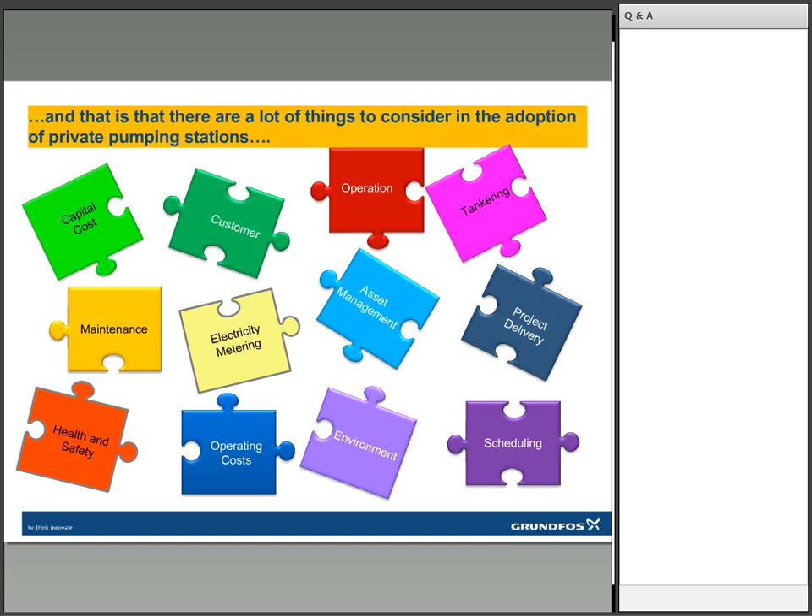Firstly, and I think the most important thing that we've got to consider is the customer. It's a key element to this, and we're going to be entering a relatively new environment here as stakeholders working in domestic environments, and I know that we have adopted the private assets years ago. However, a lot of that is not inside the building, and we can carry out a lot of the work outside of the building.

Here, from what we've seen, we've got lots of assets that are inside buildings, in garages, and we need to look at that, and we need to look at our different mindset working in that environment. Grundfos has got quite a lot of experience of that with our heritage in building services.

We need to look at how we work with the customers in terms of call center services. We're going to see an increase in calls. We're going to have a lot of new data that we've got to deal with. How should we address that? We've got to look at the scheduling of work to these domestic properties, access to the domestic properties and to the facilities where some of these assets sit, and what that might mean in scheduling and abortive calls.

We need to look at how these stations will be metered and how customers might be billed for electricity that they are using, and if that's off the customer's current electricity supply. Overall, we've got to look at the disruption that this is going to cause and what that might mean also to some of the regulatory measurements that Ofwat might put in around this.

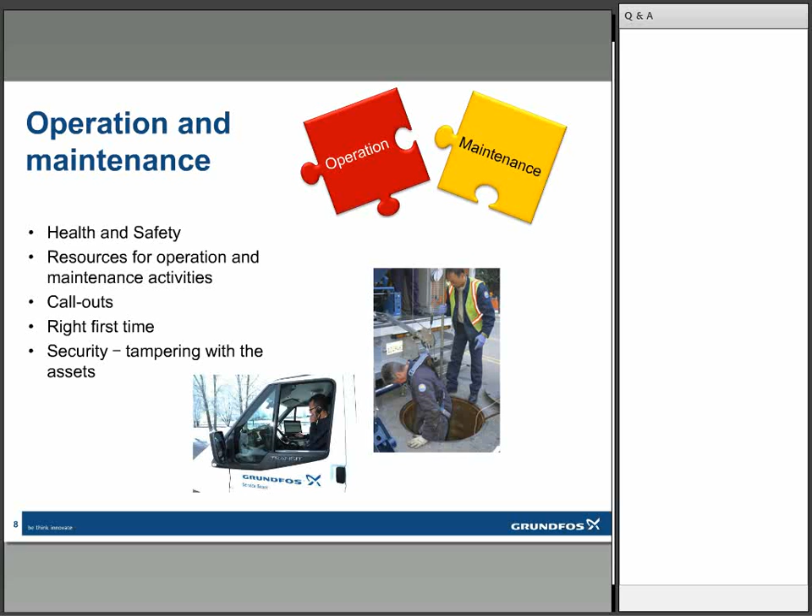What we're going to see here is lots of much smaller pumping stations, typically smaller than 2 kilowatts, and what we believe will actually happen is that those costs are likely to flip over, so that maintenance costs through blockages and overall maintenance will be significantly higher than power.

If we take an example of some of the stations we've looked at so far, some of these stations are using less than 100 kilowatt hours per annum, and in pound note terms that's something like £15 per year. Compare that to one site visit to unblock a pump at, say, £200 - you can see the really important thing is to get the blocking and characteristics right so we don't have those call-outs.

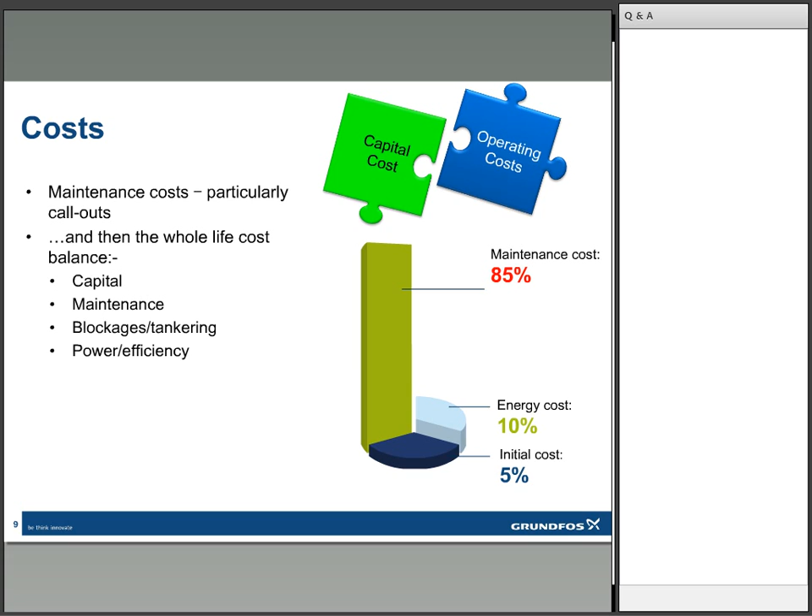Accepting, however, that there are some pumping stations that are bigger and power efficiency becomes more of a factor, we're going to have to do some project work. We're going to have to improve these assets, and safety is again key to that.

In a domestic environment where we've got less space, we are going to be working very closely with our customers, and we don't have the same ability perhaps to fence off areas. We've got to look at how we ensure we create a solution that is safe during construction, but also subsequently for operation and maintenance activities.

One of the things some of the people we've been talking to in the water companies are talking about is separate power supplies. That in itself will cause significant disruption in bringing the supplies in, and the logistics of working with the DNOs in getting separate power connections. So we've got to look at all of that - the space and the access. A number of really key issues in there.

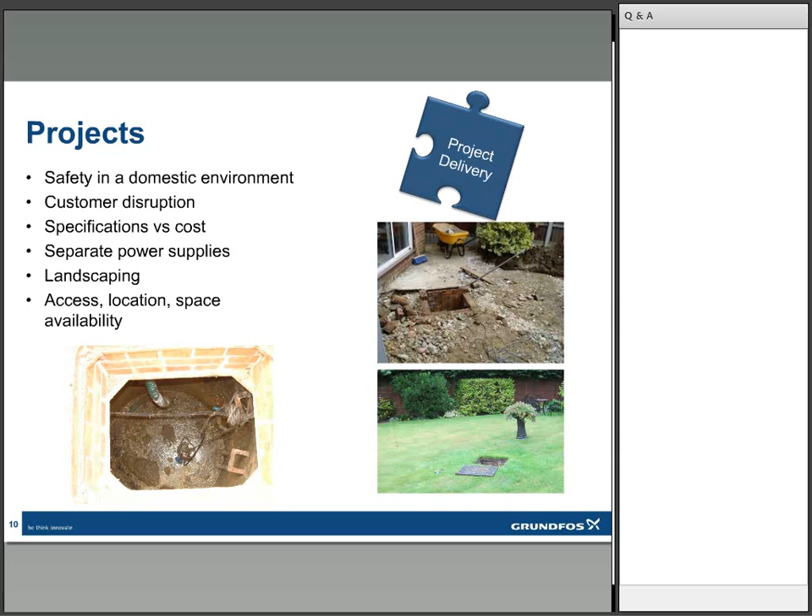So what can Grundfos do to bring those pieces of the jigsaw together? We've got lots of products and activities that we've been looking at with our customers, and I'm now going to hand over to Matt, who's going to talk you through some of the things we've been doing.

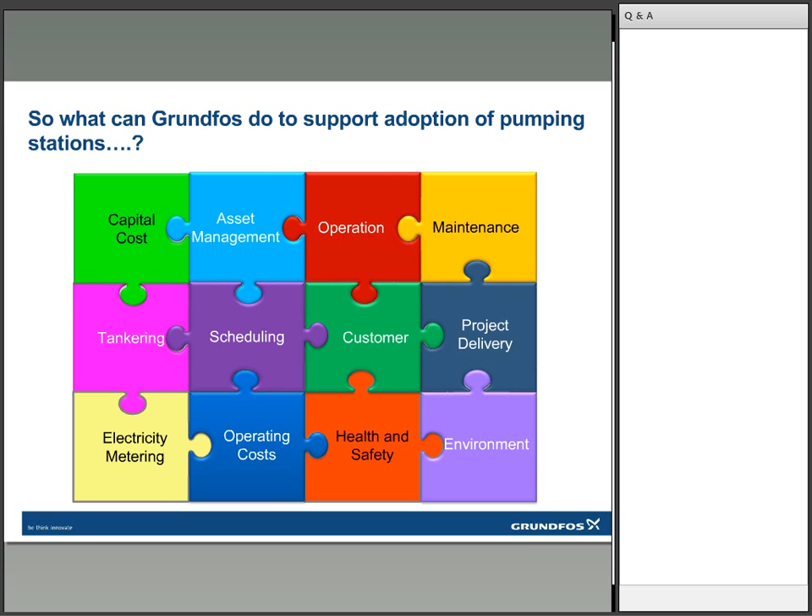With an auto-adapt pump, he could remove one of the healthy pumps, put in an auto-adapt into a safe electrical supply, and then that station would be fully operational - getting the customer out of trouble and taking the heat off the situation.

Then a decision can be made to see what the next step is, whether it's another auto-adapt pump in its place or a replacement control panel in the future. It also allows us to look at the historical information collected via the pumps, so we can look at maintenance strategies behind individual stations - if there are high maintenance or problematic stations, we can make sure we hit it with the right approach.

Again, the customer faces less disruption, and with it being a plug and pump, that call-out, as mentioned previously...

This can obviously help in the project from the initial off - we're saving in access, location, and space availability with the size of the CIU, the common control panel, and it's not even needed.

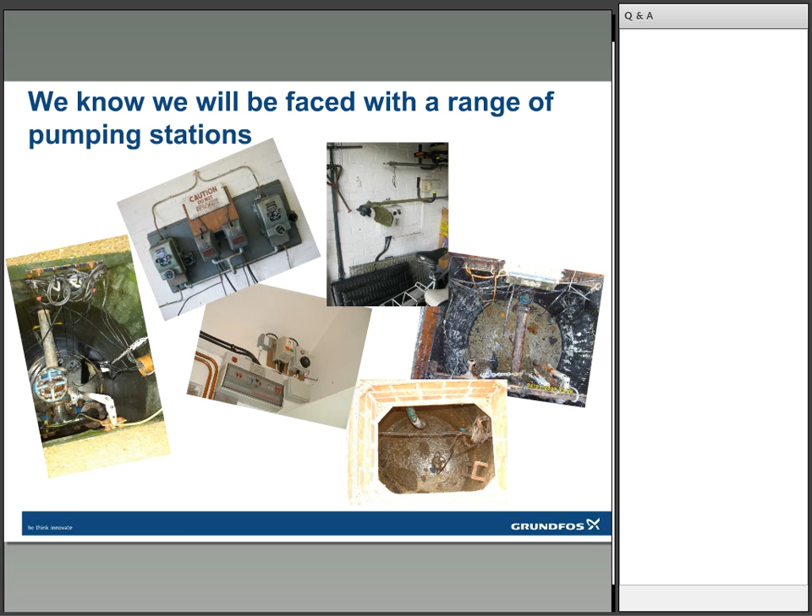You don't need to have that space for a control panel. And lastly, it reduces the capital cost. You haven't got a control panel that you've got to fit. You haven't got float switches that have got to be set up or fitted or bought, and you haven't got that labour, that site labour to install those components. It is two pumps connected to two local isolators and

a healthy supply, so that capital cost can be greatly reduced. So another solution that we have to assist in this jigsaw puzzle is the package pump stations that we've developed. We've got GRP stations as well as polyethylene, all that can be modular in design.

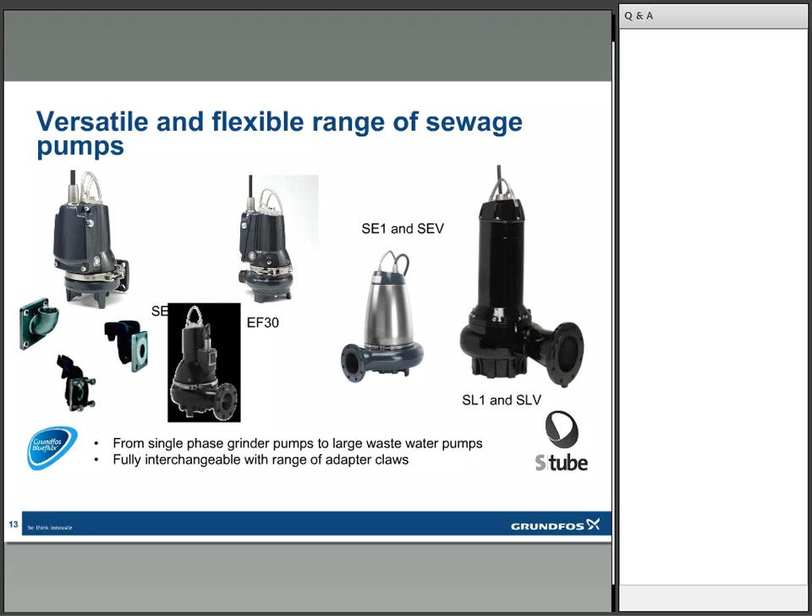We can cover a vast range of sizes, through big to small to narrow, to cope with many different installations and things that we may be faced with. Some of the features of the pump station: we've got the heavy traffic, we've got the PE covers, and we've also got quite another innovation in the tank, the bench tank form, that allows the sludge to basically be guided towards the pump, so we can reduce the tankering by getting rid of that sludge and assisting

that pump in getting rid of that debris. You can see some of the extras and some of the different variants in this slide here.

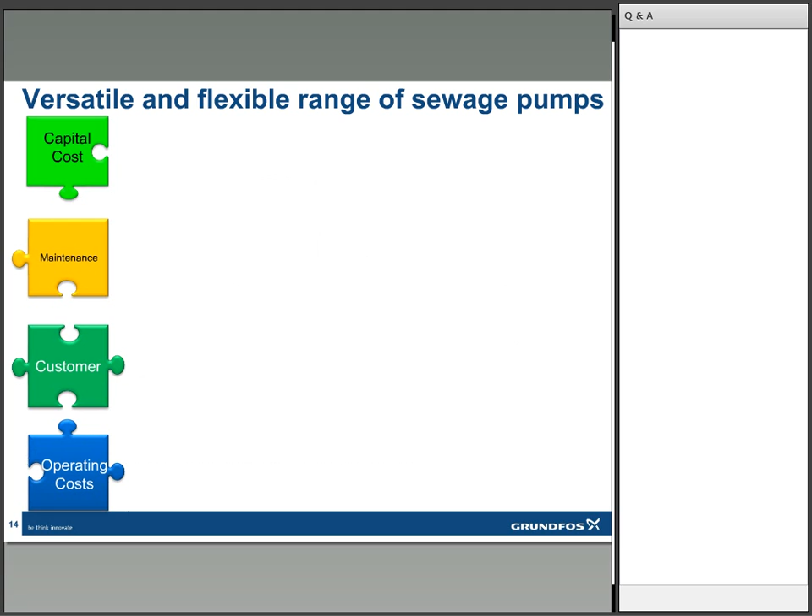But we have other options of the galvanized pipework or the PVC ABS pipework that you're probably familiar with.

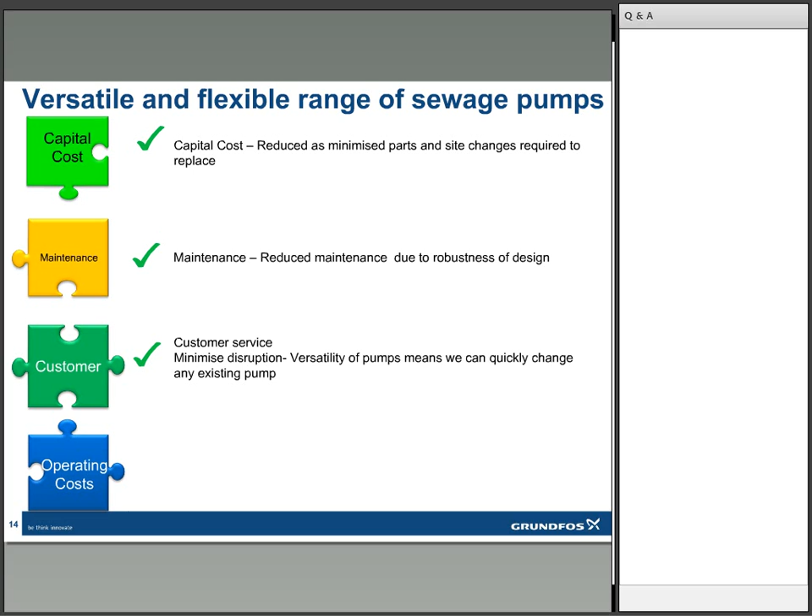Another key safety feature, familiar to most utilities companies now, is a key feature. I think we don't need to cut corners, even though we're looking in reduced station size. We also have the option for separate valve chambers, which I think covers the WIS and WIMES specs presently, so we can adapt quite happily what we need to do in these

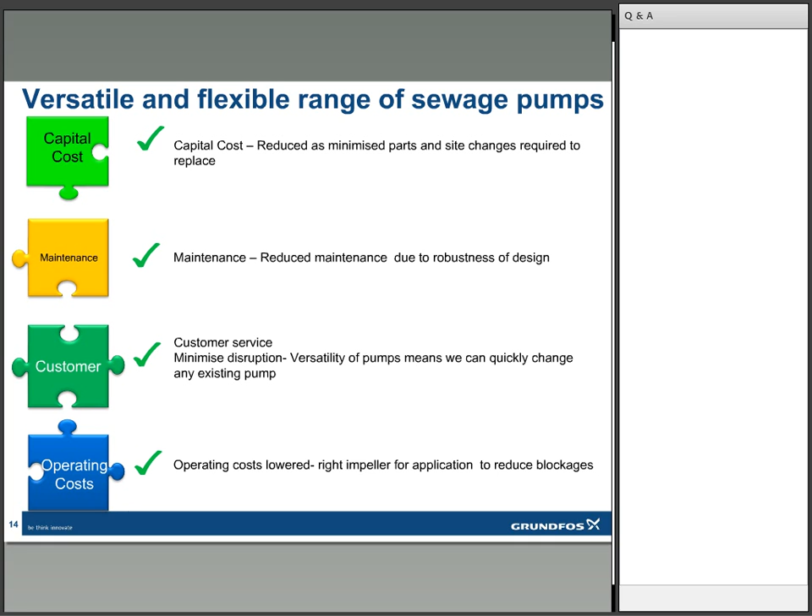projects. As you can see from that picture on the bottom, with a large pumping station, we can deal with that as well.

So covering the jigsaw pieces, obviously health and safety there is a big one, as I spoke about, with the reduced risk with the features, safety grills, lockable covers. We've got reduced site labour with off-site build. We can get it all correct in the factory and test it in the factory prior to being delivered to

site. So we're again looking at reducing the capital, engineering time and other sort of solutions with the concrete pours. It's being done in a factory environment and reducing those costs.

Project delivery, again, lessening that disruption, less time on site, less footprint, less damage to the property, less footprint that we need to take up. And with the full range that we have with all the different sizes, we can look at reducing the space availability that we've got, covering that.

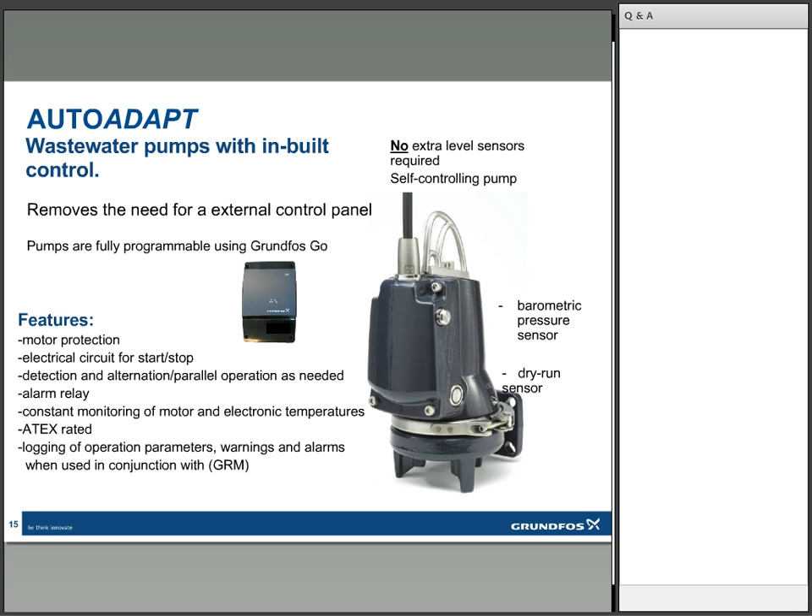The GRM features and benefits we can give out from the pump stations that have got the auto adapt feature, high level and overflows, motor heating, and time for service. This system also works and can be used in conjunction with other manufacturers' pumps. It's not just suited to the auto adapt, so it's flexible in that sense.

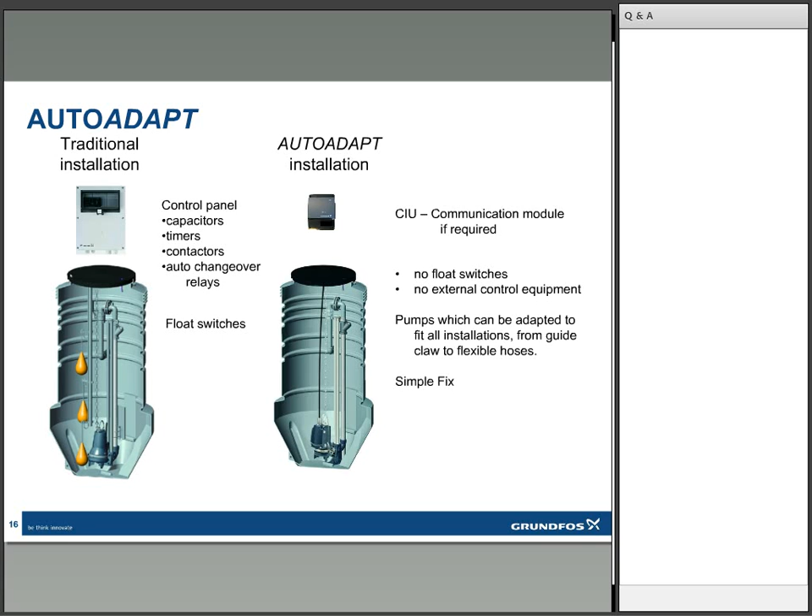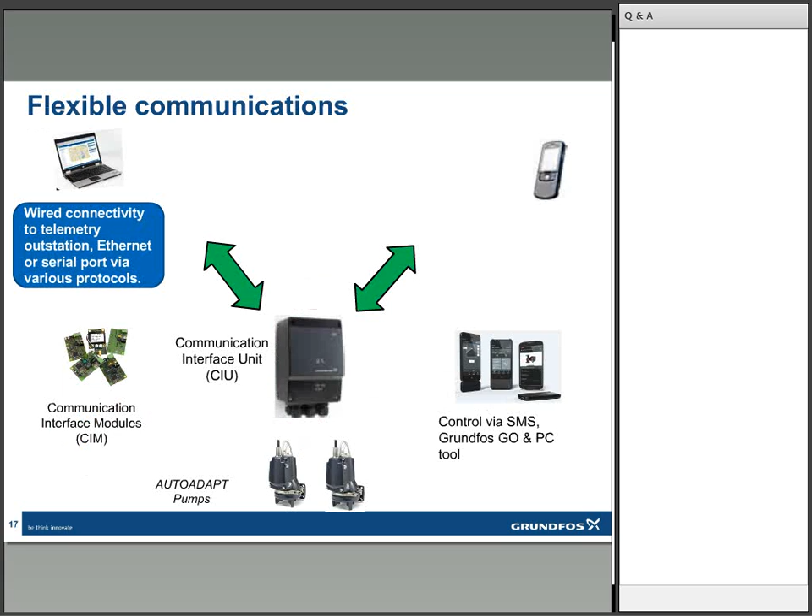We currently have a trial going on at the moment, using the auto adapt concept, GRM, and one of our macerators. The particular station in question is a pumping station that's shared with 3 homes. It's been a problematic site with heavy rag content and suffered frequent blockages. So we've installed 2 pumps, some new non-return valves, and our CIU 272.

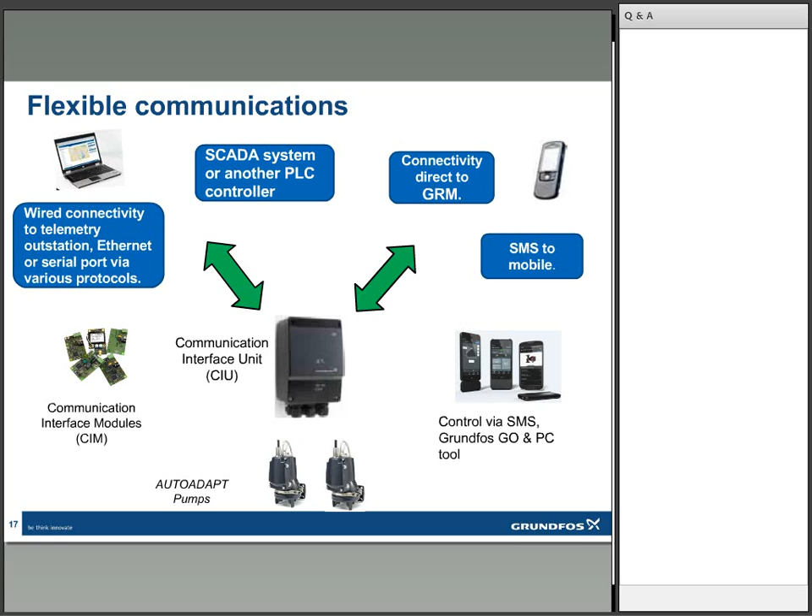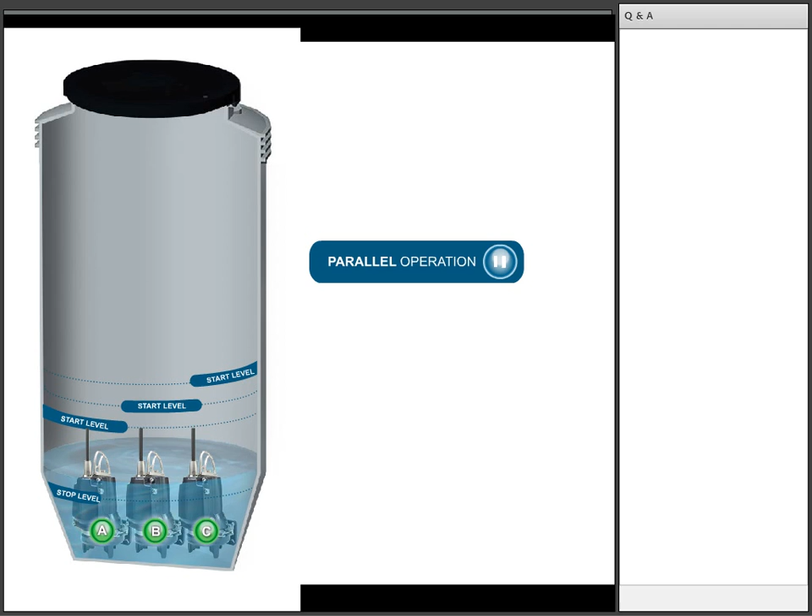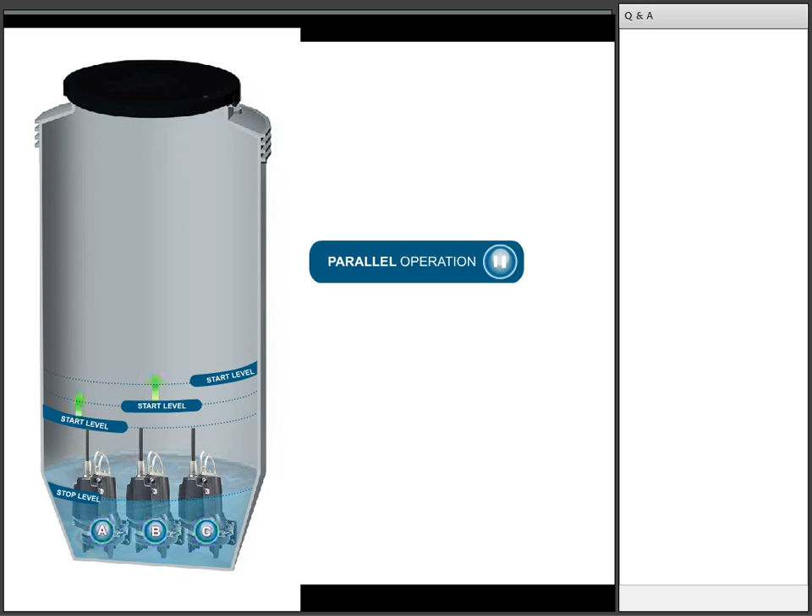But unfortunately, sometimes it's not okay, and you're probably wondering where I'm going with this one. With this trial, the pumps were fitted, and about 4 weeks in I received a text message and an email on my phone telling me there was a power out at the pump station. So I thought I'd give a courteous phone call to the homeowner and just say I think there's possibly a problem, the pumps have lost power. So I gave him a call, to which he answered the phone quite shocked, as I mentioned I think there's a problem with the pumps, you've got no power. To which he replied, well no, my pumps are fine, but my toaster's just gone bang.

And with that, he found it amazing that I was actually able to know this information, as he was en route to the fuse box to reset the breakers to try and finish cooking his lunch. But what he commented was that this was quite a unique feature, really, because the previous summer one of the pumps had actually tripped the main electric, and he had lost the contents of his freezer while he was on holiday because there was no electric in the house.

So it sort of opened us up to the new environment in which we'll be operating, and new sorts of issues that we may be faced with, however unexpected they may be.

So returning back to the GRM and what we can look at and what we can see, there's an indication of the level of the sump. Again, that is real-time data, and that can be extremely useful. We can also see the overview of the 2 pumps, what's fitted, serial numbers, and their current status, and you can see some of the operating hours, temperatures and amperage that it's been using, and more importantly energy consumption, which I'll come on to shortly.

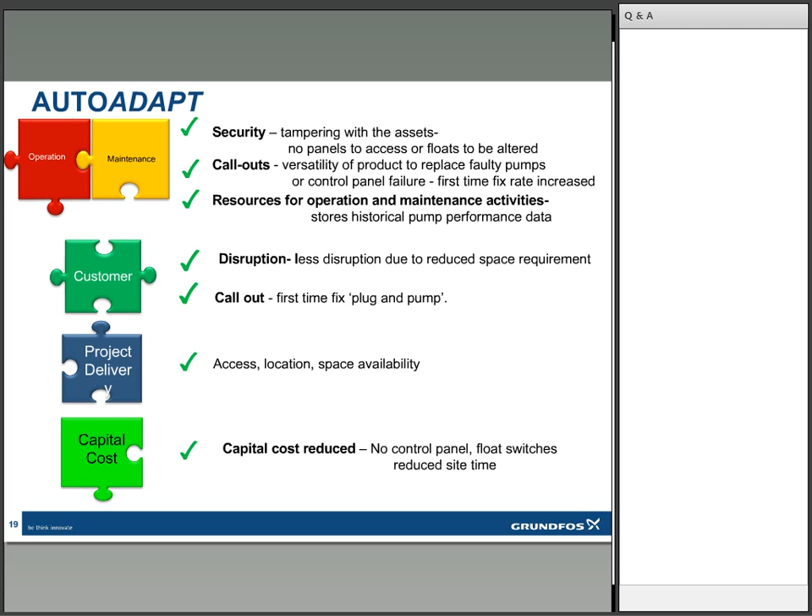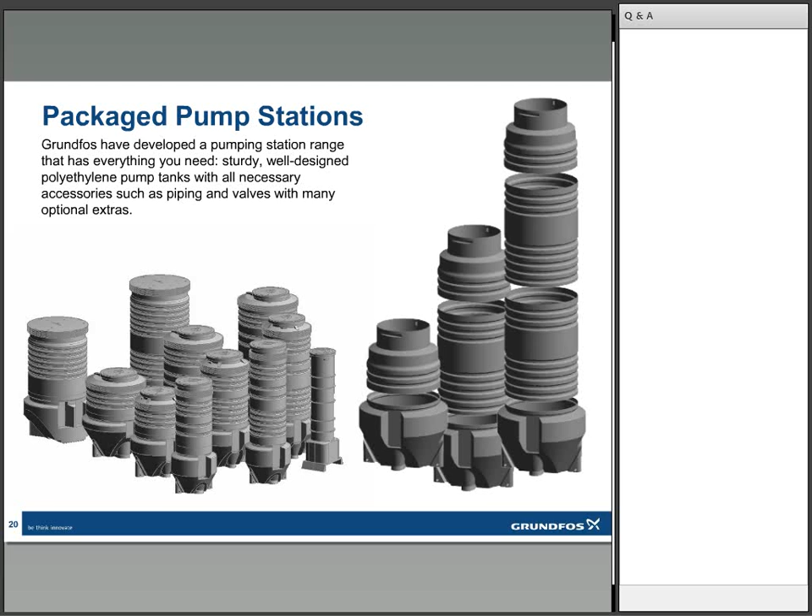This leads us on to the settings. These are all changeable remotely. You don't need to put an engineer to site to change these, and these can be such as the high level, start levels, and the start band. And also you can change some of the key features.

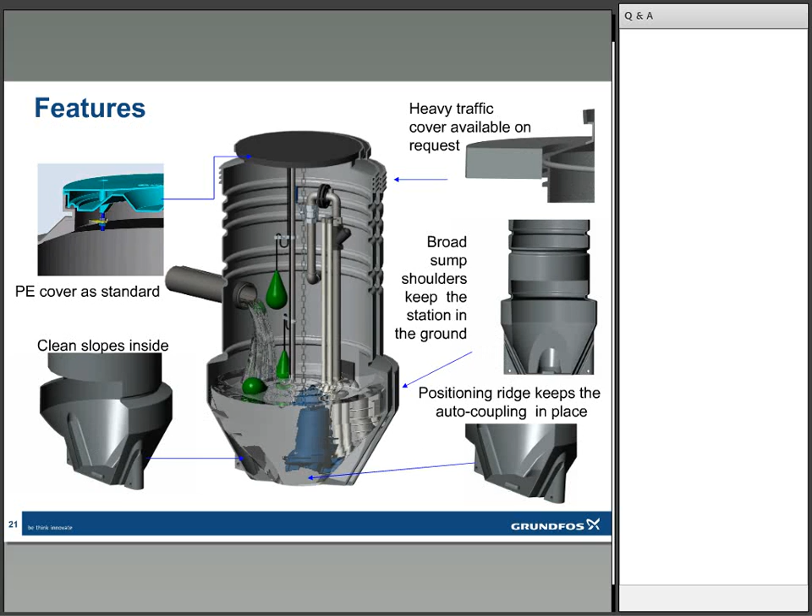So over the next 2 slides, I'll go over the pieces of the puzzle that we can quite safely say we've covered off. Mainly the customer through the call centers, and how we can interact with those call centers, whether it's from our GRM or whether it's our system talking to someone else's system, such as SAP maintenance.

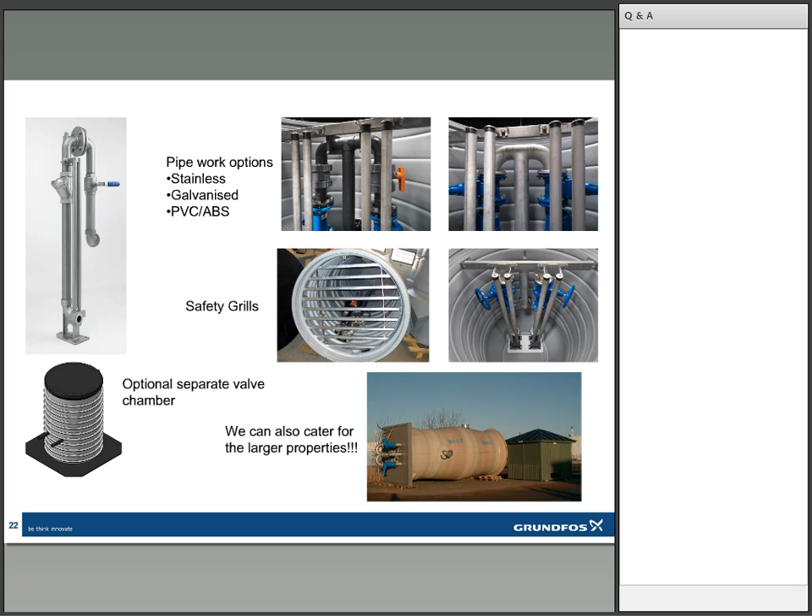It's storing that data that could be shared. It assists with the scheduling of preemptive maintenance, or maintenance visits, to actually service a pump due to its operating hours as opposed to time. So if it has done its 3,000 hours, you can actually monitor that effectively. And again, looking at reducing those aborted calls.

Asset management pretty much covers all that we've spoken about and what Andrew mentioned. With the plan versus reactive maintenance strategies, we can see the stations out there that are high maintenance and suffering maybe with some neglect, or some education that may be needed for the customers using it. Asset data collection again is storing all this information that can be used to get things right first time, and making those decisions far better.

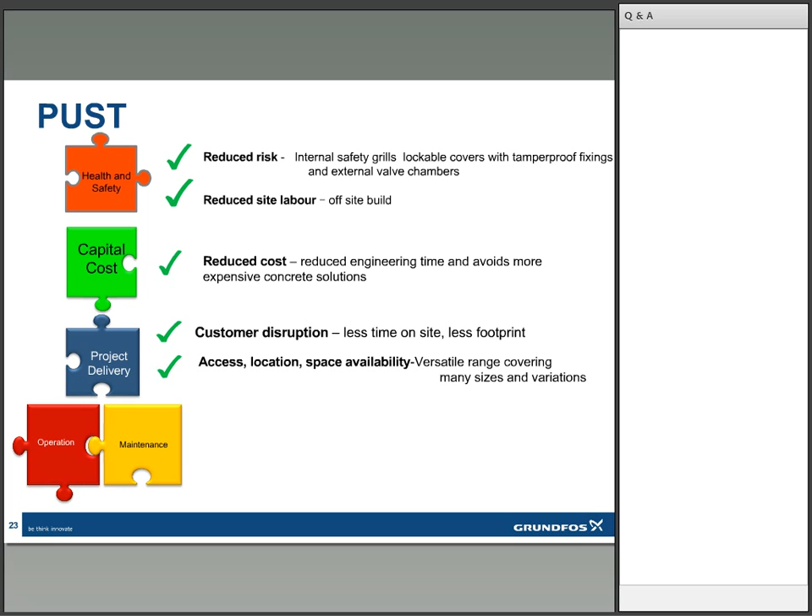Call out - it's sending that information to that call center, or to that individual service team, letting them know of the problem. It gives them a true indication of what that fault is. It's not just a high level, it's telling them what's happened. They can interrogate it before they get there to get that right first time fix.

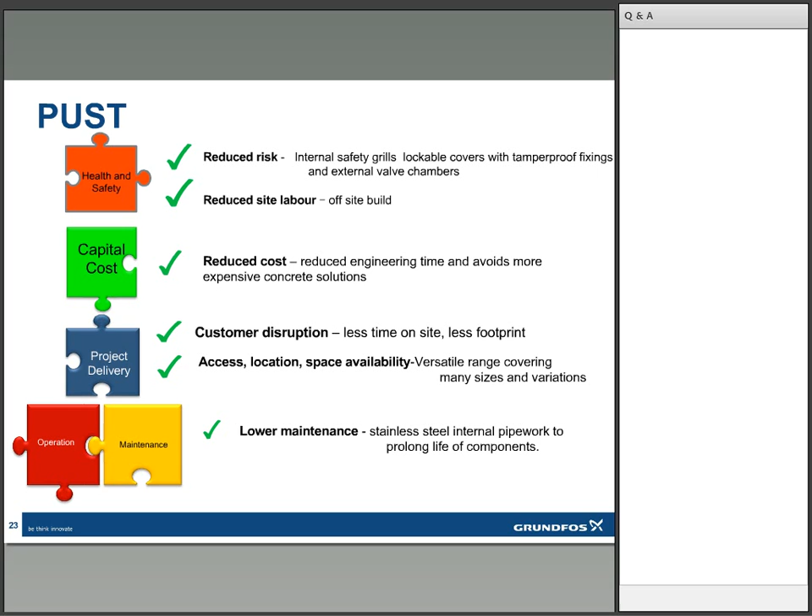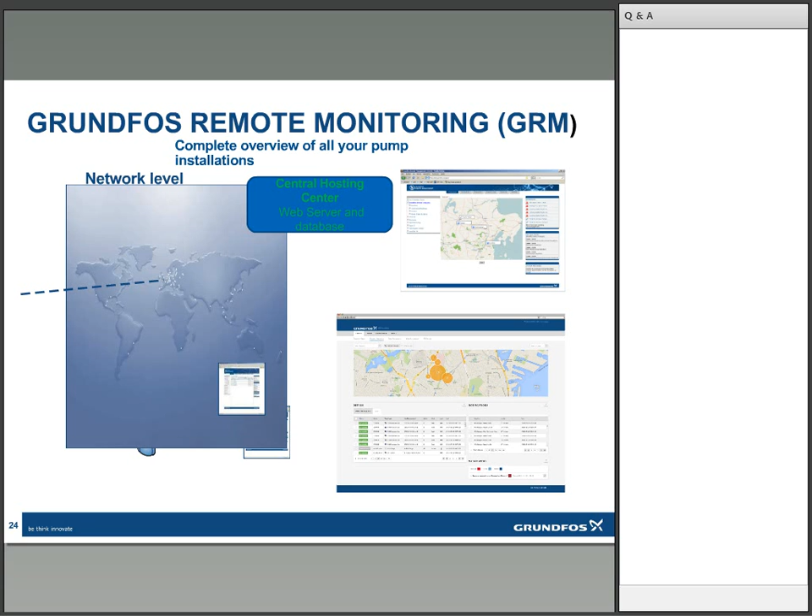So I'll pass you back to Andrew now, and thank you for listening, many thanks. Thank you, Matt. And I think in summary here, we're just...

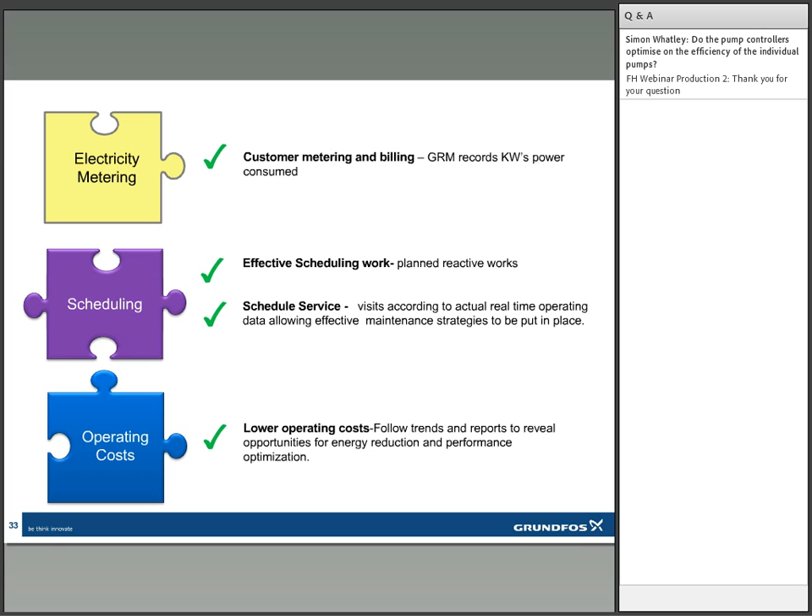Thank you, Matt. I think in summary here, we just want to go through some of the things we've talked about that bring together the pieces of the jigsaw. I think first and foremost, the customer experience is central to making this work. Make sure that we create solutions that minimize our time on site and the disruption to the customer, and minimize the space that some of these new installations need to use. You've seen from some of the slides today how we can do that.

One of the key things we've got to look at is being flexible and versatile in what we do. We know that different water companies are taking different approaches to the way they are taking over these pumping stations.

Control side of things, what we need to be able to do is provide solutions that are versatile to meet those individual water company needs. And safety, it's really important that we don't compromise our safety because of these new pumping systems. We've got to make sure that we provide solutions that do that. Some of the things we've done today and have available to us allow us to do that quickly, even in the first few months and years of running these assets.